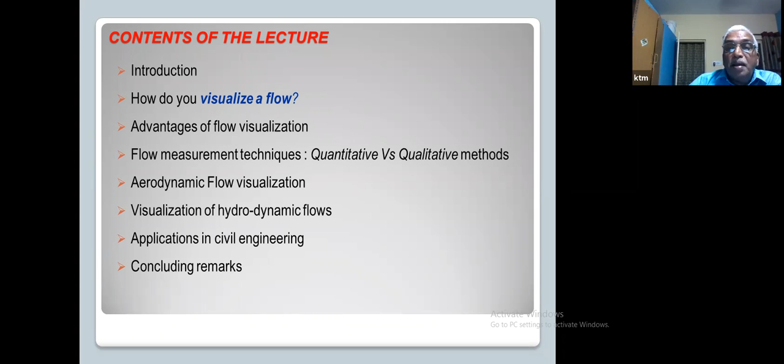And flow visualization has many applications, not only in the aerodynamics of flows. It is also very important in hydrodynamics. It has many applications in civil engineering, and I'll also give an exposure to some modern techniques like shear sensitive liquid crystals, which I have worked on for some time. I have only a very short time. Within 1 hour, I have to finish all, so I'll make a very brief introduction to these things.

Now, as you know, most fluids, air, water, whatever it is, are transparent, and their flow patterns are invisible to the naked eye. So how do you visualize the motion and the interactions of the fluids with the surroundings? There are many ingenious techniques developed for this. In flow visualization, the flow pattern itself is made visible and can be observed directly. You can see it, photograph it, or record it on a camera. Now, as I told you, it has many advantages.

It doesn't require complex circuitry or complex instrumentation, which is expensive and difficult to set up. You can make quick qualitative checks. Instantaneous information over the entire flow field is available. When you make conventional measurements like hot wire or LDV, you get only point-wise information. With flow visualization, although it's qualitative, you get velocity information and flow characteristics over the entire field. That is very attractive because you get a quick result. Then you can start your mathematical modeling, computational work, or measurement work. So flow visualization is easier than the quantitative methods, and it helps in understanding the flow phenomena.

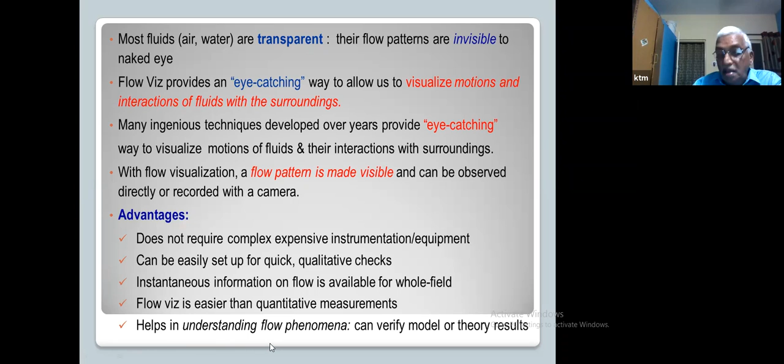Now, what are the types of methods? What are the equipment and methods used for flow visualization? For gas flow, we have what you call surface flow visualization, wherein particles are mixed with an oil, and small dots are put on the model surface or surface of interest.

With the flow on, you take the photograph. Second thing is silk tufts: very thin, small, short silk tufts are pasted or glued on the model surface, and with the flow, the pattern itself is recorded.

Then there is a much more attractive method called smoke flow visualization. Now, the entire flow field or the model surface, for example, is illuminated with a flash lamp or an LED lamp or a laser, and you let in smoke or fog as tracer particles. You can do a video recording of the flow, or you can take still pictures of the flow, which will reveal the qualitative information of the flows.

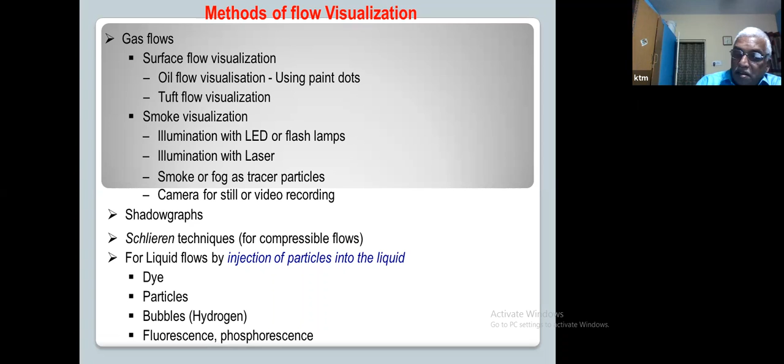Then for high-speed flows, compressible flows, you have shadowgraphs. You also have schlieren techniques for compressible flows. For liquid flows, we have injection techniques. What you do is you inject a dye, color dye, or particles, or hydrogen bubbles, or air bubbles, or you make the flow fluorescent, and with the flow on, the fluorescence changes, and then you can get the flow pattern easily. Seeing is believing.

I just want to tell you this. Say, when you look at a car, with your eye, you see nothing. You see nothing of the flow. Now, when you really visualize that, you will be thrilled to see that this is the pattern. This is the flow pattern around the car, which you can never imagine.

Or look at this beautiful von Karman vortex street. I hope you have got an aerodynamics background, right? All of you can understand what is von Karman vortex street, vortex breakdown, or vortex shedding, etc. So this is a beautiful picture of von Karman vortex street behind the wake of a circular cylinder at very low Reynolds number, and it's beautifully pictured.

Look at the third picture. Can you ever imagine a hurricane looks like this? We see this on TV nowadays, but unless you do the visualization, you can't know. Of course, this is natural visualization. Nobody has done any visualization. It's taken probably from a helicopter or a plane, from which you could see the pattern of the flow in the hurricane Fran.

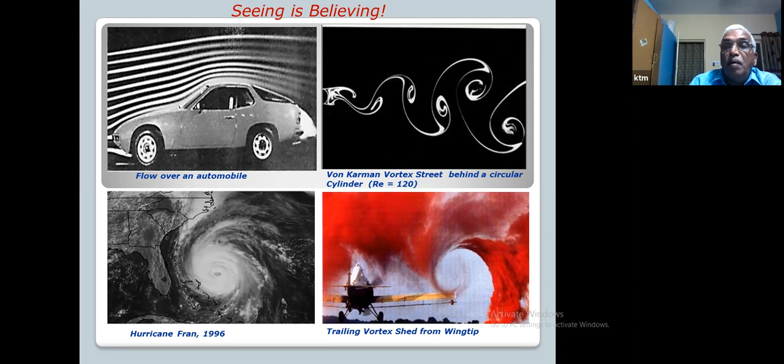Look at this fourth one, the trailing vortex shed from the wingtip of a flying aircraft. You can never believe unless you see that this is the kind of flow around there.

Make a quick comparison between qualitative and quantitative methods of flow measurement. Now, the first thing that comes to mind is the easiness of setting up. As I said earlier, it's easy to set up a simple flow visualization setup compared to a quantitative measurement instrument. You don't need any great expertise or skill. You need some technical skill, but you don't need to be an engineer to make a flow visualization setup. On the other hand, if you want to make quantitative measurement with LDV or PIV or a hot-wire anemometer, you need some understanding and an engineering background.

Easiness of operation. A flow visualization setup is easy to operate. On the other hand, there is complexity of operation with any of the intrusive or non-intrusive measurement techniques on the quantitative scale. Quickness of the results. You can almost immediately see the results on the camera or the recorded pattern of the flow in the case of flow visualization, qualitative checkup. In many cases, on the other hand, quantitative takes some time to get the data recorded, analyze the data, and get the necessary information on the flow characteristics.

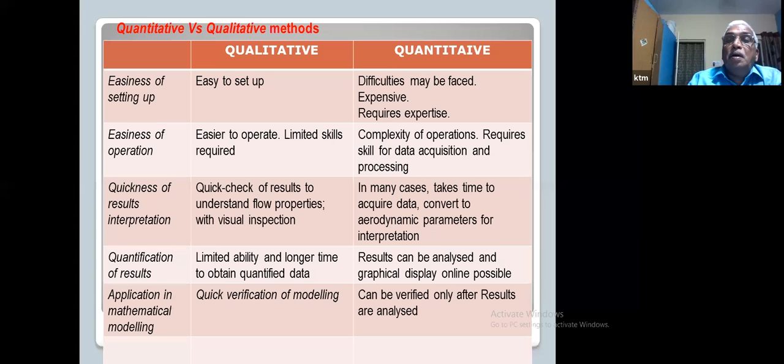Quantification of results is much easier with the quantitative methods, although it is limited and takes a longer time to obtain the quantified data from a flow visualization. Then, of course, mathematical modeling: you can have a quick verification of the modeling with the flow visualization data rather than quantitative experimental data. This is the gist of the comparison between qualitative and quantitative methods. We'll come to the actual visualization now.

Now, as I told you, the first method I mentioned was surface flow visualization, visualization of the flow on the surface of the model. There are two methods popularly used. One is the tuft method. The silk tufts are placed on the model, and you get the flow pattern recorded when the flow is on. You can see tufts on a delta wing on the left side, a tuft flow visualization picture.

In the second method, the oil flow visualization on the right, you mix fine powder of titanium dioxide or fine aluminum powder, etc., in an oil medium. Typically, it's oleic acid or SAE grade 32 vacuum pump oil, or sometimes people use turpentine too. Mix this for some time, finely mix it, and then put small dots on the surface of interest, and leave the flow on for some time. You get the nice pattern shown on the right side.

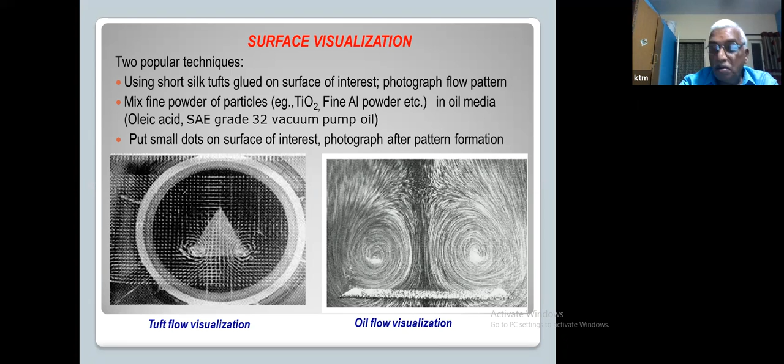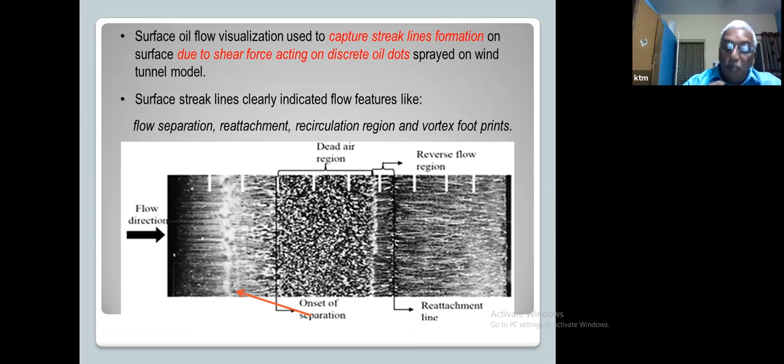as I've clearly shown. So this gives you fantastic information before you start any actual measurement or mathematical modeling. This can give you terrific information much faster than a quantitative measurement.

Smoke flow visualization. As I mentioned, smoke is let into the wind tunnel test section where you have the model, but you need illumination. As you can see, this is a typical setup for smoke wire flow visualization. The main components are the tunnel, of course, the test section, and the top of the tunnel; except for illumination, you leave the whole thing blackened so that light will not get reflected from there and external light will not pass into it.

Then the camera or the sensor is mounted on a frame, and on the frame there is also a heating wire, as you can see, which is usually a tungsten corrugated wire, through which about 120 volts is passed. Of course, one can control that, and depending upon the smoke you require, you let in the voltage.

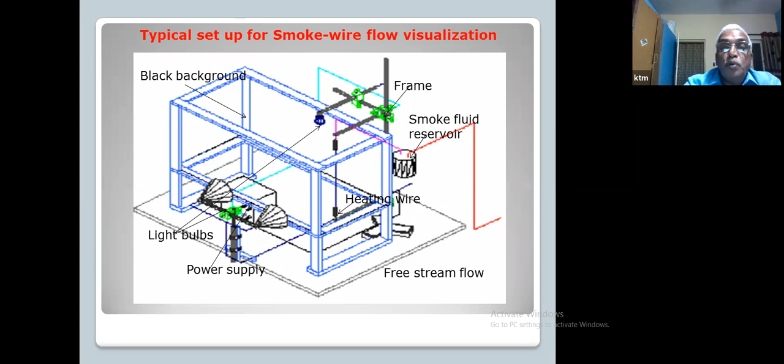Now, as you can see on the right, there's a smoke fluid, usually paraffin oil, and it's pressurized. So when the pressurized paraffin oil falls over the corrugated wire, it gives out smoke, because it's a heated wire with the paraffin oil dripping over it under gravitational force. With the flow you can get the flow pattern, as I'll show you in the next slide.

We did several studies. One of them which appealed to me was the flow visualization studies on two low Reynolds number airfoil models. One is the Eppler 61 and the other one was the SM4308 airfoil. Now, as you know, you need flow control for good performance of a wing, an aircraft or an airfoil. One should do flow control and remove the LSB.

You know what is meant by LSB? Laminar separation bubble. The laminar separation bubble causes a lot of problems: drag, separation, reduced stall angle, etc., because once the laminar separation bubble sits on the wing of the aircraft or an airfoil, the stall angle comes down considerably. So you need some method by which you can control or mitigate the effects of the laminar separation bubble or flow separation.

But how do you decide? How do you go for separation control? There are many techniques for separation control, but the main issue is what is the optimum location for placing the control device. Now, friends, in the next two slides I'll show you the effectiveness of flow visualization to locate the place where you have to keep the control device. I've given the other details.

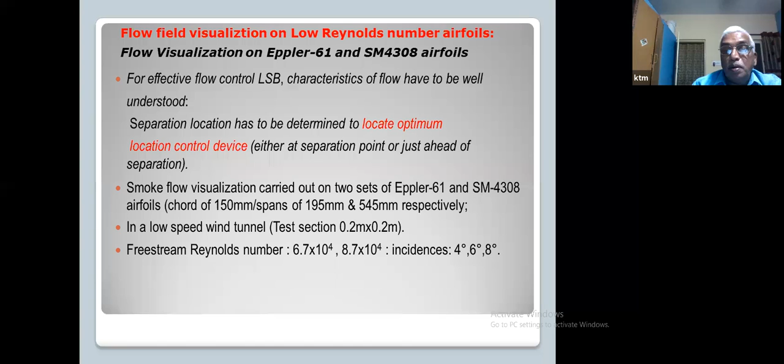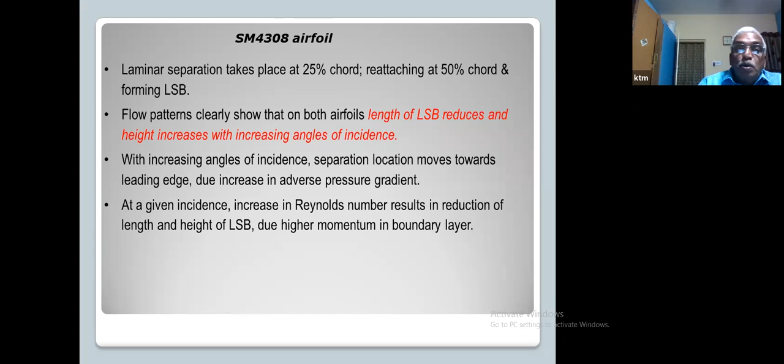Now, we studied also, as I told you, the SM4308 airfoil, where we saw that the laminar separation bubble occurs at 25% of the chord and reattaches at 50% of the chord. Now, flow patterns, as you can see in the next, clearly show that the length of the LSB reduces and height increases with increasing angles of incidence, as shown in this.

This is a much better picture we got. We are very happy to see such nice flow visualization pictures. These are again, as I mentioned, at two Reynolds numbers, 67,000 and 87,000, at three angles of incidence. What is important to note is that the amount of effort required is much less compared to a quantitative measurement technique like LDV or a particle image velocimeter.

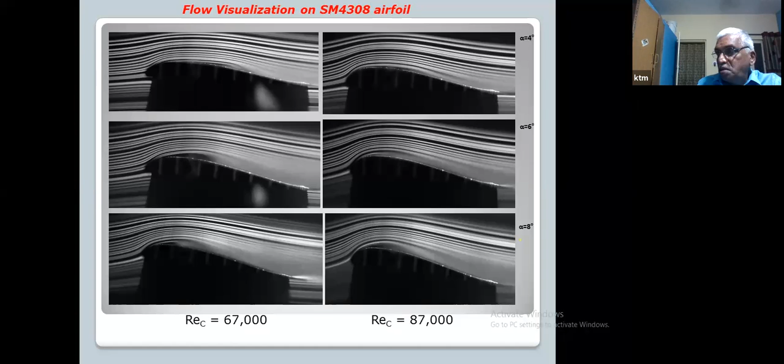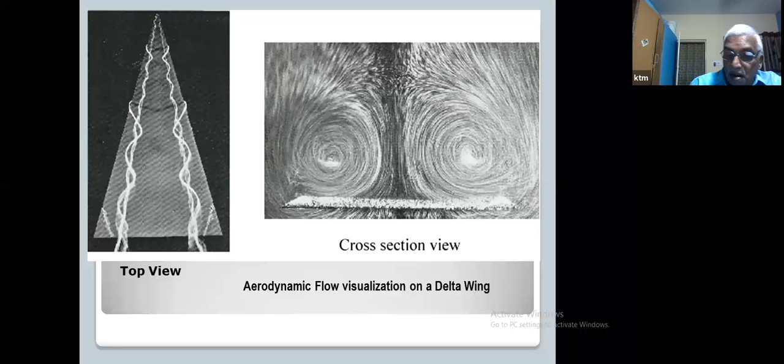This is an old picture of the top view of a delta wing studied in a water tunnel and a cross-section view of flow visualization of a delta wing. This is a beautiful picture of the tip vortices on a delta wing, front, top and side views. Very, very attractive to see that. And if you want to measure these tip vortices and visualize that, it would have taken an awful lot of time.

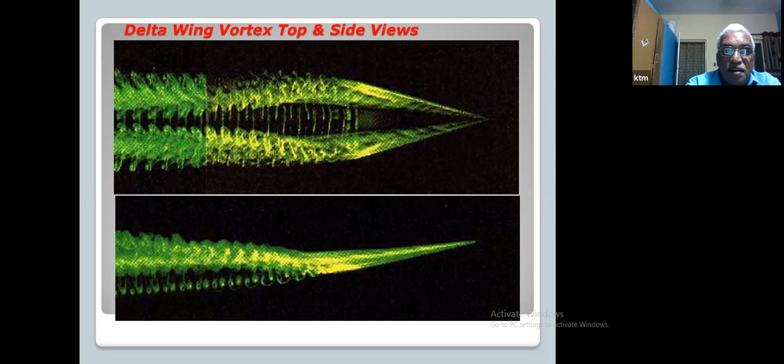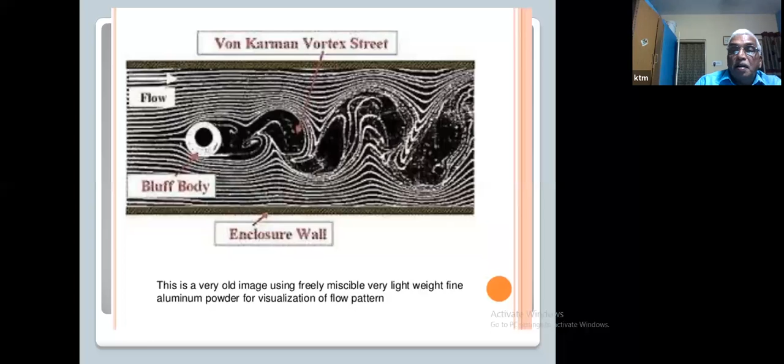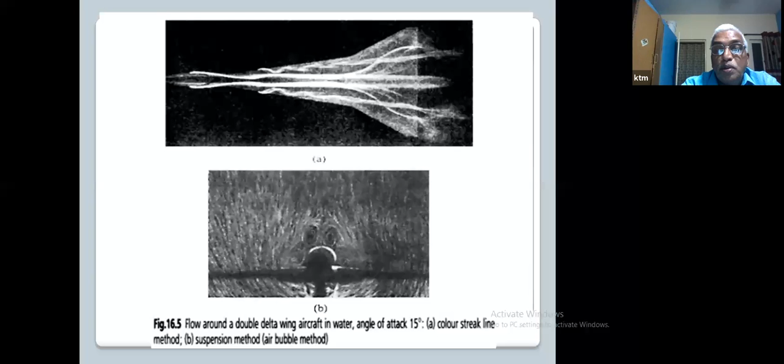This is flow around a delta wing. The first one is done on a double delta wing, actually. Double delta wing done in the water at 15 degrees. Actually, the photograph is not color. So the color streak line method, which I have written there, is irrelevant. It's a black and white picture of a color photograph. And then using the suspension method, flow visualization is realized on a double delta wing.

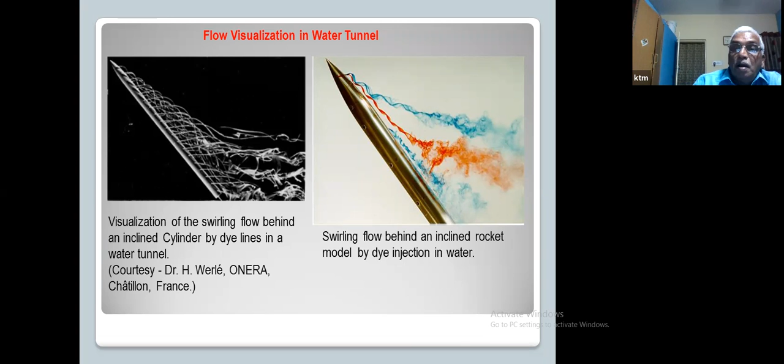Now we will go to another method or another concept. Now, this is for compressible flows. What you have seen so far is generally for low speed flows, low Reynolds number, relatively low Mach numbers or no Mach number, very low speeds, about maybe 10 meters per second to 30 to 40 meters per second. So such flow visualizations can be done for incompressible fluids using those techniques like smoke flow, etc.

So when it comes to high speed flows, compressible flows, where Mach numbers start from transonic to high subsonic, high supersonic, these methods, smoke flow visualization, cannot be applied because the smoke will diffuse and we will not be able to get any clear picture. But we have methods which I'm going to show. In fact, I'm going to show you three methods by which you can get conclusive results about the flow parameters or flow characteristics under the compressible flow regime.

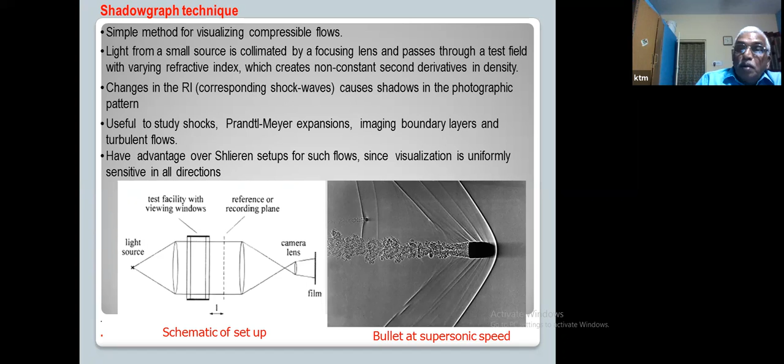Now we will go to another more elegant and more precise technique called schlieren photographic technique. In this technique, there's a light source passed through a narrow slit to make the beam as narrow as possible.

There are two concave mirrors. One illuminates the test section, which contains a model with fine lines of light, and the reflected light is collected by the other concave mirror, falling on a knife edge and finally on the camera or recording device. So what happens now?

When there is a refractive index change, the optical path gets shifted, and the knife edge will prevent the light from falling on the recording device, so much so that there will be a dark patch. So corresponding to every shock wave, there will be a dark patch recorded by the camera.

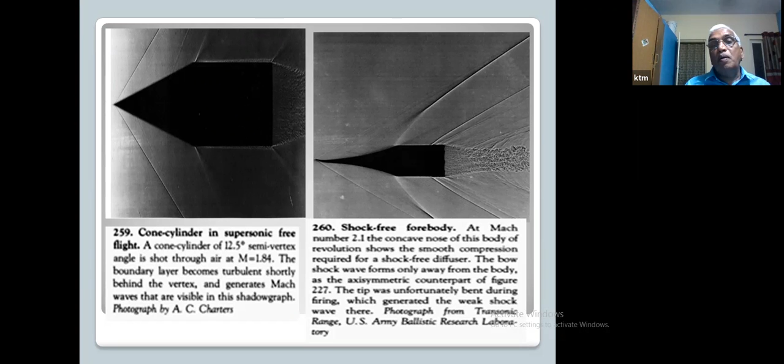Shear sensitive liquid crystal - I used to joke, I did some work before I retired using shear sensitive liquid crystal. So I used to say that after my PhD, I have been doing SSLC. This is a very...

attractive technique, and there is a lot of difficulty. There is a lot of application skill required to apply this technique. That's why it has not become extremely popular.

But we did some experiments in a supersonic tunnel at, in fact, 3 Mach numbers: transonic, 1 supersonic, and 1 high supersonic.

Now, the basic principle is very simple. Some cholesteric liquid crystals have a property where, when the liquid crystal is applied on a surface, a model surface, with shear force acting on it, the color of the liquid crystal changes.

Now you may ask, why is it changing? The reason is it's a nice part of the physics - the orientation of the lattices in the liquid crystal changes. Normally they are all disordered. Now when there is shear force, shear stress acting on it, the orientation changes and they get nicely oriented.

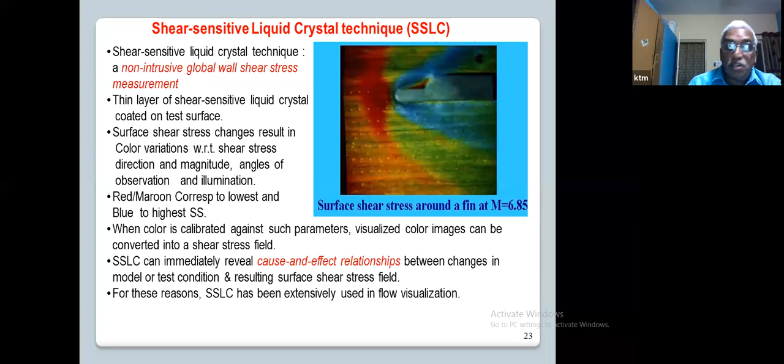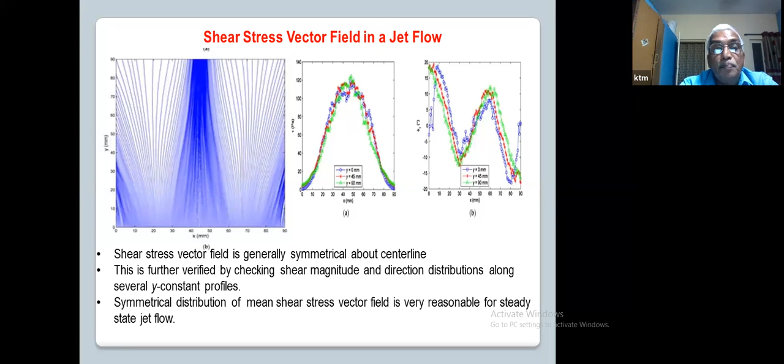These authors also did a quantitative measurement, and what they could see is the symmetrical distribution and the highest shear stress on the center line. And of course, as you go away from the center line, the shear stress reduces.

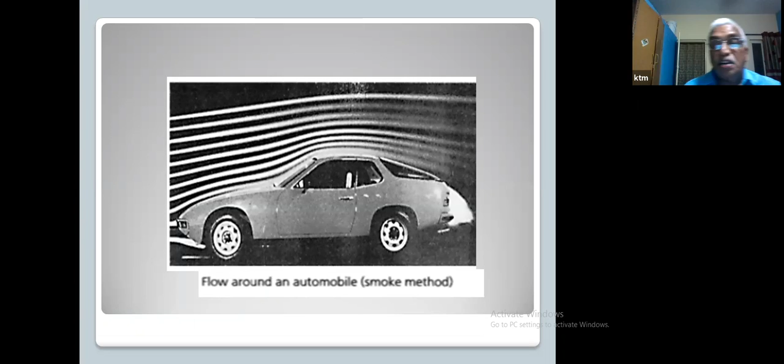I have shown you this only to demonstrate the fantastic applications of smoke flow visualization for vehicle aerodynamics. This has been taken from a famous book called An Album of Flow Visualization, which I will give the reference for at the end of the talk.

So the first one is a wake behind an automobile with the tuft method, which I talked about earlier, the tuft grid method. Tufts are placed in a given matrix, and with the flow, you get the distribution of the velocity or the pressure, as seen in the second image around the vehicle.

Now this is slightly different - they have applied fluorescent dye on the tufts. With the illumination, you get a very nice flow pattern on the car or Jeep, as you have seen on the right side.

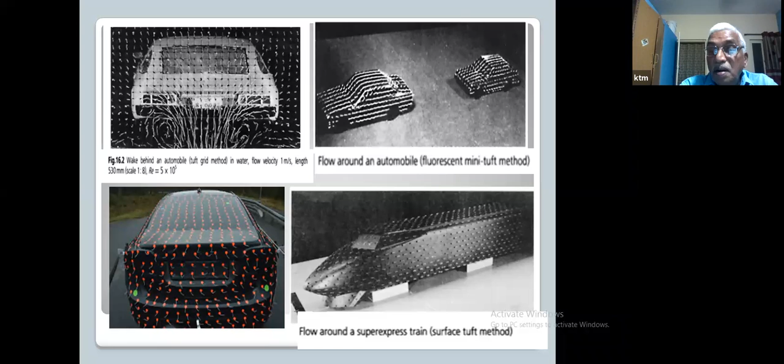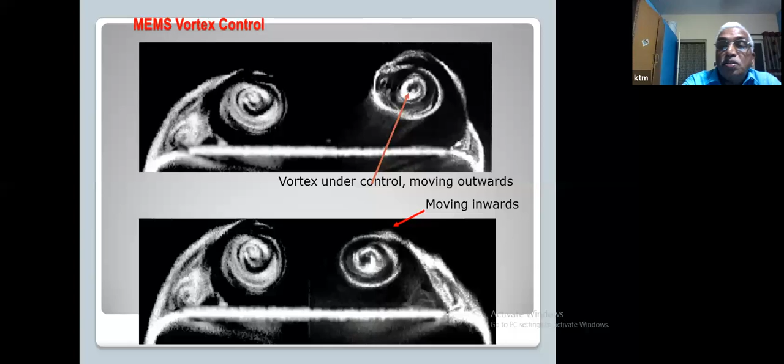What you see on the left is again the tuft method, showing flow around a super express train, with the surface tuft method shown on the right side. Now, MEMS, microelectromechanical devices, can be used for vortex control. It's a flow control device, and how effective it is for vortex control is demonstrated by this flow visualization.

Coming to industrial or building aerodynamics, applications of flow visualization for civil engineering, we did work for some undergraduate civil engineering students, and I was also involved. The question was how to find an optimum shape for a tall building, one where the drag or wind forces are minimum, so that building stability is maintained for a very long time.

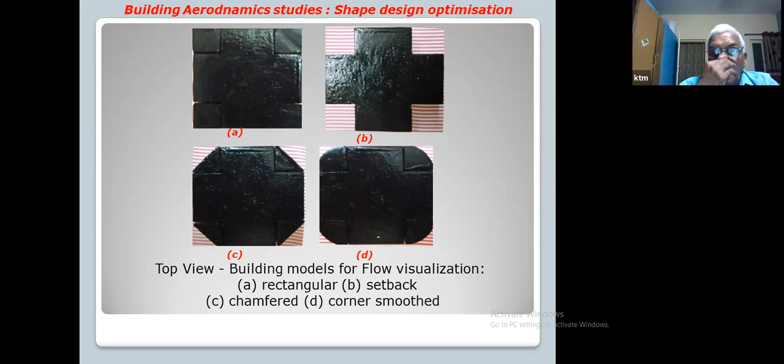So we took 4 models: one rectangular model on the left, then a setback model with openings on all 4 sides, then a chamfered model, and also a corner smooth model. We checked in our wind tunnel which one is most effective in giving the least drag or least effect of the wind.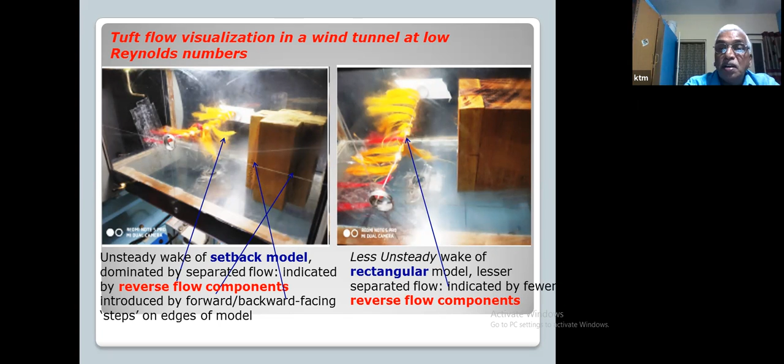Coming to the next picture on the right side, it's a rectangular model. Because there is only one forward-facing and one backward-facing step, the flow is much more steady, and the reverse flow components are much less, so the steadiness of the flow has increased.

Next, we tried chamfering the building. Many buildings have this chamfered shape, but because of the steps faced by the flow, there is still unsteadiness, as you can see.

Finally, we tried a smooth cornered building where all 4 sides are rounded. Aesthetically, whether it looks good or not is not the issue here, but it is more stable: there is much less drag, the wind flow is much less effective, and the wake is much more steady, with much less unsteadiness. Also, pollutants will not stagnate near the building. So the best optimum shape from what we found was the corner smoothed building, which seems to be a good application.

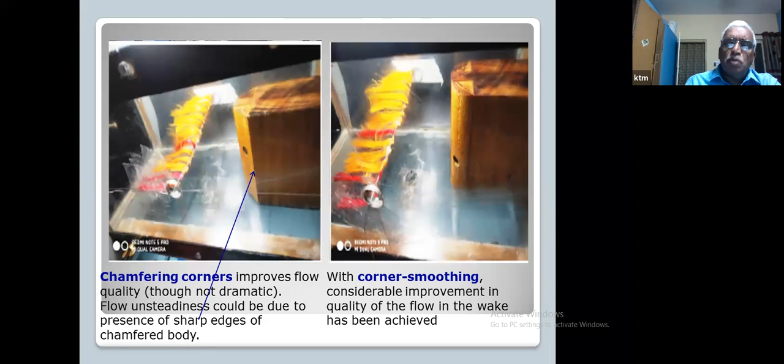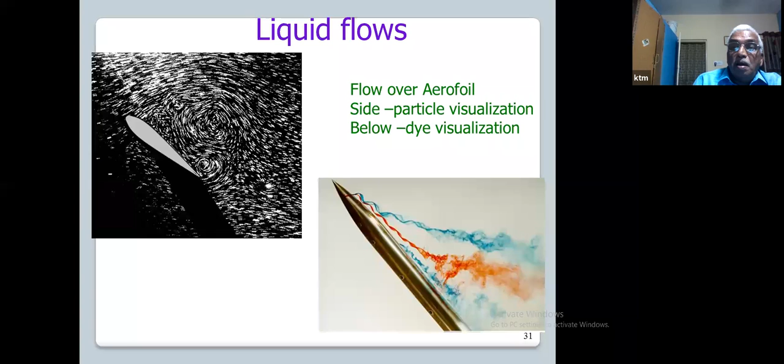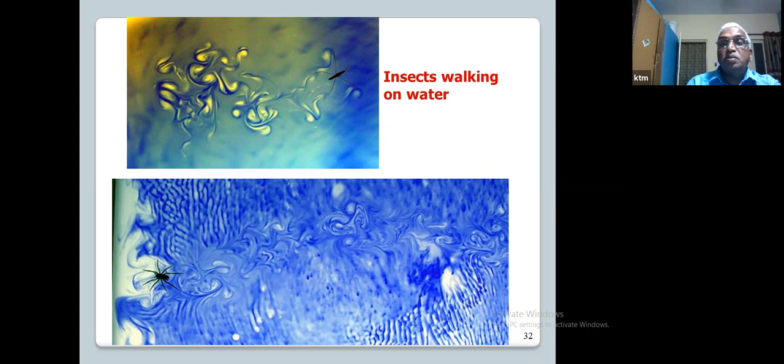These are what you might call creeping flows, with very, very low Reynolds number and very low speed, like millimeters per second. But with ingenuity, this author has recorded a fantastic path or trace of this insect walking on water. Beautiful, really very beautiful - it takes a lot of effort and time, but it's worth appreciating.

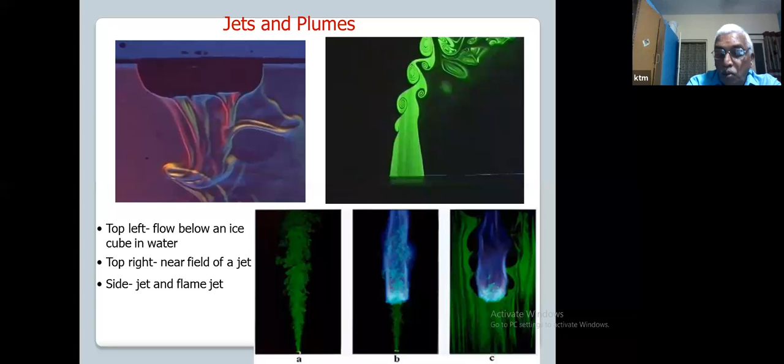Jets and plumes, beautiful pictures. On the top left you see the flow below an ice cube in water, the near field of a jet which you've seen a number of times earlier, and a jet and flame, showing how it looks when visualized.

I would like to show you one video. I don't know if it works. Okay, one second please. I hope I can play this video. Yeah.

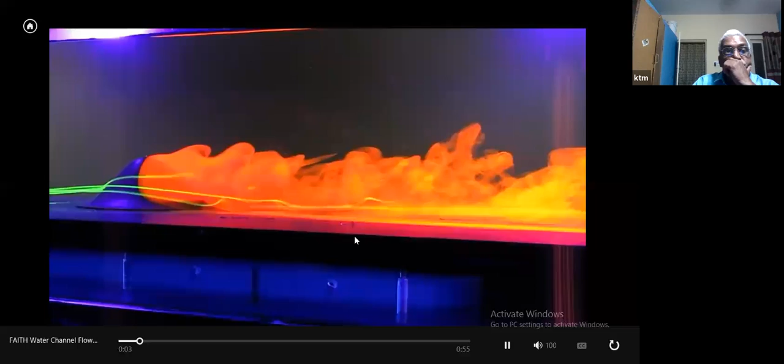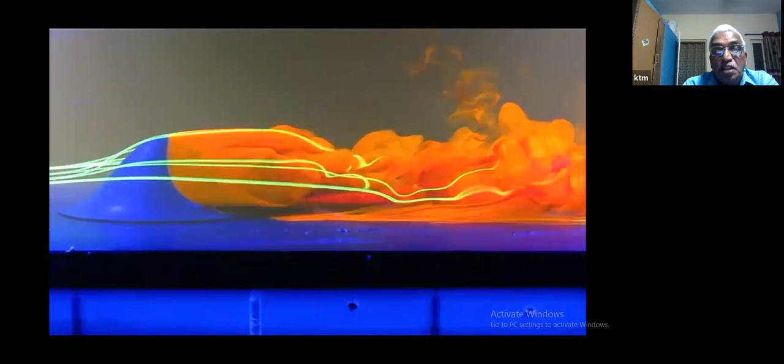This is a video of a hump placed in the water channel. See how beautiful the wake and the forward flow, everything is traced. This is enjoyable - this is what you call seeing is believing.

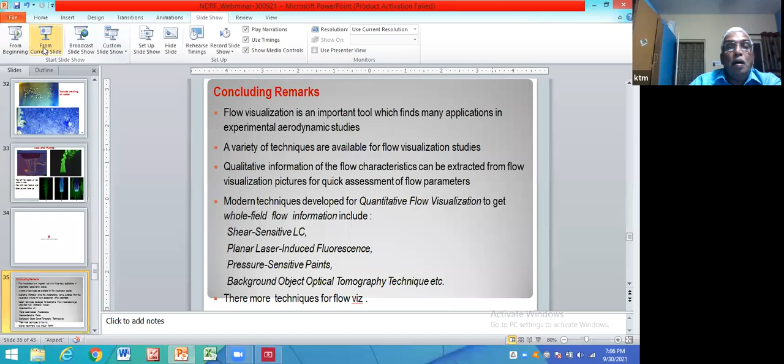I would like to conclude by saying that visualization is a very important tool which finds immense applications in experimental aerodynamics, and many other branches of engineering like hydrodynamics, flow visualization in water tunnels, and flow visualization of buildings and bridges. A variety of techniques are available today and more are being developed as time goes on, like in any other field. Qualitative information of flow characteristics can be extracted easily, but quantitative information is also possible.

I haven't shown you, except for shear sensitive liquid crystals, how to extract quantitative information, though it's quite possible to get streamlines and other quantitative data, but it needs more effort compared to other measurement techniques. Modern techniques are being developed for quantitative flow visualization - I'll call it QFV - because you have qualitative flow visualization, but you get quantitative information from it, so we call it QFV, or quantitative flow visualization on the whole field.

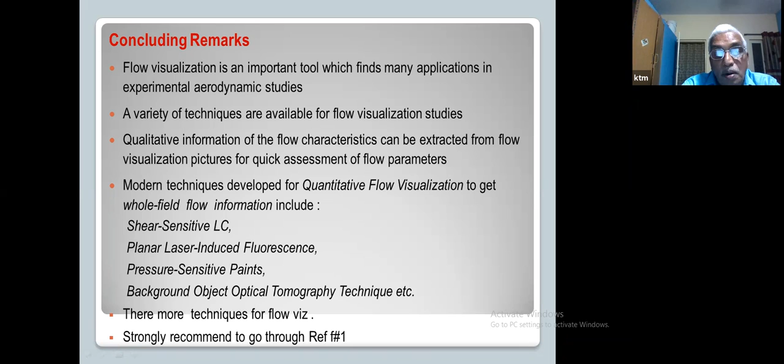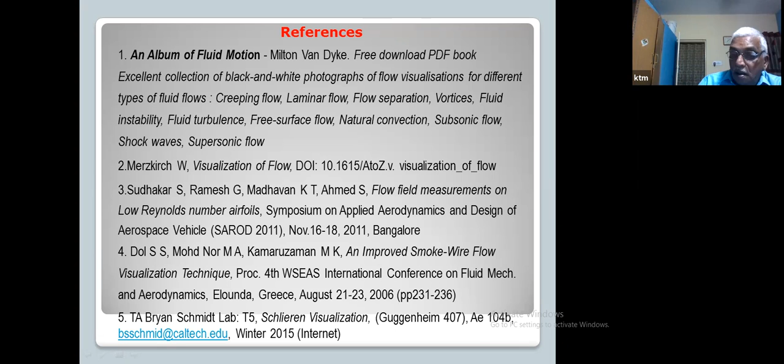Many more techniques exist in flow visualization, and I have given a list of references at the end. Since this meeting is recorded, I hope you can get the references given at the end of my lecture. I very strongly recommend all of you go through reference one, 'An Album of Fluid Motion' by Milton Van Dyke - fantastic. Some of you might have seen it, but those who haven't, it gives a terrific, impressive picture of many kinds of flows in nature. You will be very impressed. These are all the references, some from work done by us at NAL.

So now I will stop here, and the session is open for questions and answers.